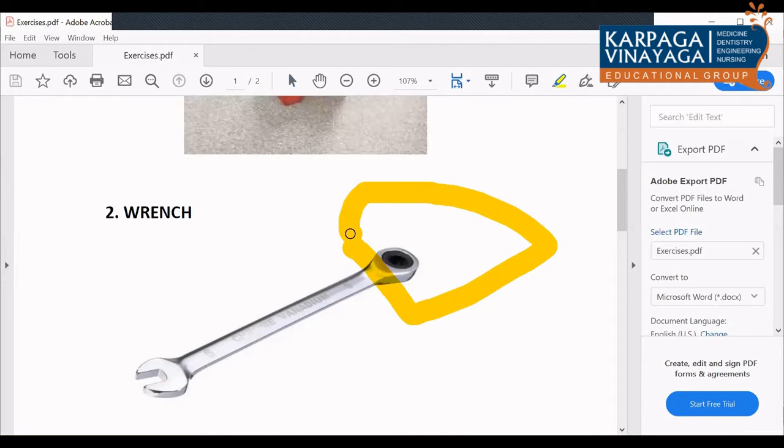So here how I am going to design is, first I am going to design this part. Next I am going to design this one. Next I am going to design this rectangle part. So I am splitting this into three different parts.

One is this ring, and another one is this end, of the nut and bolt size - what is the common nut and bolt size. So going to design this, then I am going to design this rectangle, then I am going to assemble all these things together. This is a procedure what we are going to follow.

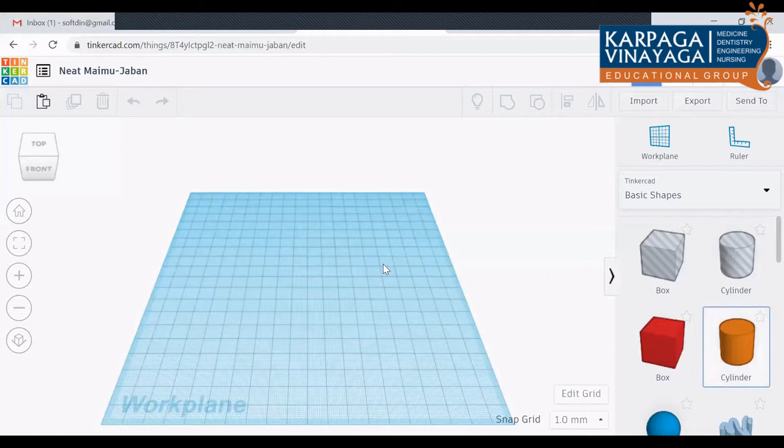Okay, so first I am going to design the ring. For designing the ring, I am selecting the cylinder and placing here. So you can select the diameter of your own dimension, depending upon the spanner size, depending upon the diameter size.

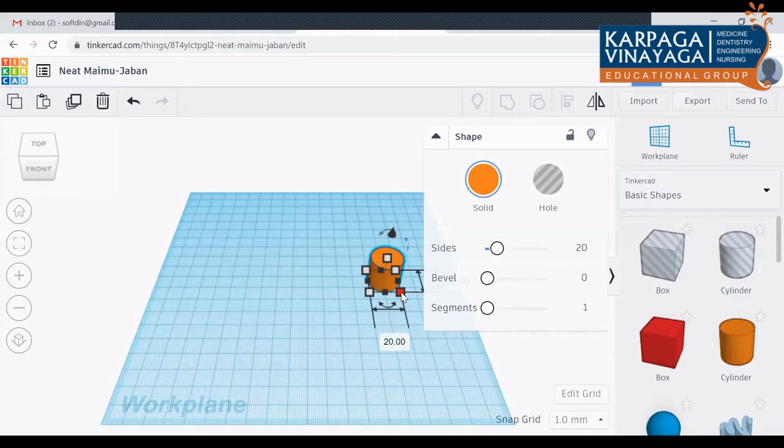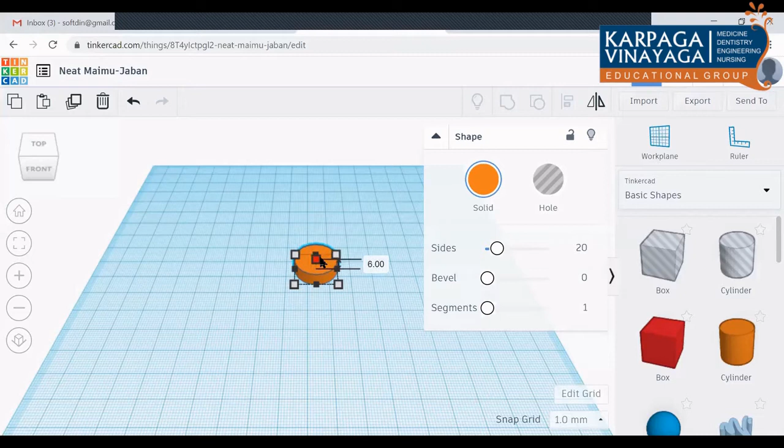If you want some 20 mm diameter size or 15 mm, whatever you want, you can select the diameter here. So here I am fixing it to 20 mm as it is, 20 mm diameter size. And width, I am going to take as the height - I'm going to take it as some 4 mm, or I can take it as 5 mm.

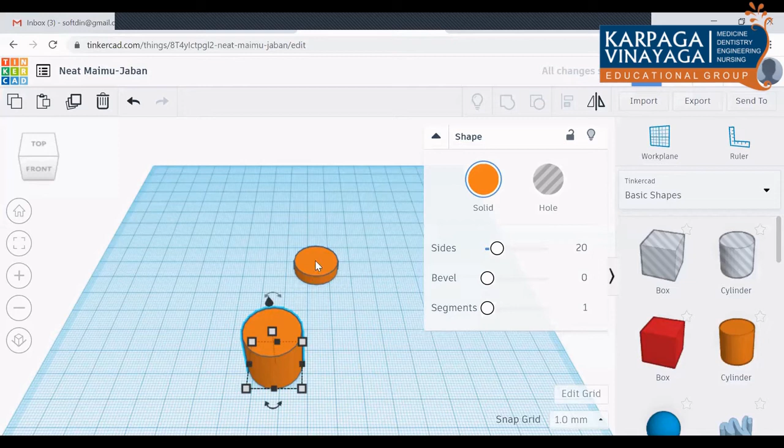Okay, fine. Next, I am going to make a hole here. For making a hole, what I am going to do is click another cylinder, place it here, place it here. You take the same diameter here - what is the diameter here? We have taken 20 mm.

The same diameter here, 20 mm. Next thing is make this as hole, this one as hole, because we are going to have a hole there. Make this as a hole. Then I am going to move this hole inside this.

For that, I am going to align whether both the things are in the same line. For that, I am going for the align option. Click this object first, next click this object second, then you click the align option. I think if I am going fast, you can tell whether you are practicing simultaneously what I am saying.

Yes sir, yeah fine. So now I am going to align these two objects in a straight line. For that, I am going to click this - can you see now, you click that center button. So now both the things will be aligned in the same straight line.

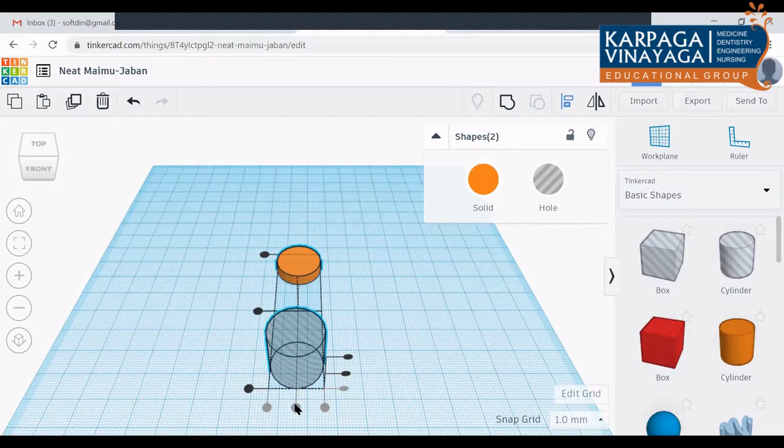Next thing, I am going to move this block over here. So click this part here. So now you can able to see - okay, so this comes over here.

Now what will happen? Can anyone tell? Both the diameter sizes are same. If I group this, what will happen? Here both the diameter of this hole as well as the diameter of the solid are both same.

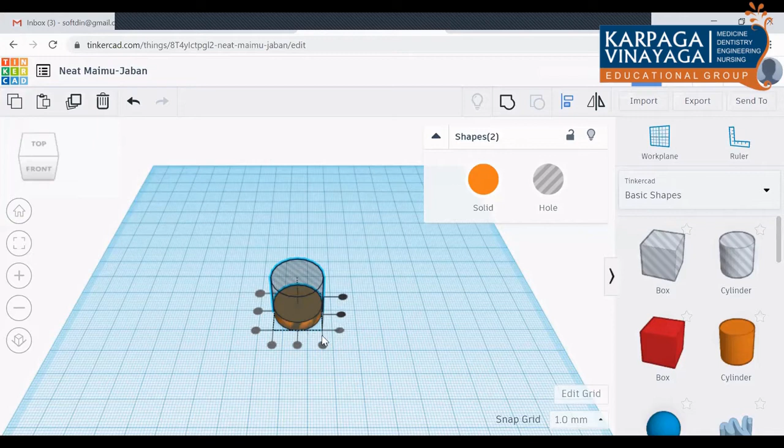I will tell you, suppose if I group this, both will vanish. You can see - clear? Because both the things are of the same diameter. So for that, press Ctrl Z, Ctrl Z.

Okay, so this diameter I have to reduce, because the hole should be less than this diameter, no? So I have to reduce that.

Sir, if you don't mind, already the ring shape is available in default. Yes, if already there, okay - default, some shapes are there here. Okay, you can take that, but this is a basic approach.

With the help of the basic shape, I am going to explain how to do this. If it's already there, you can just take that and place it there. So here I will tell you - the initial diameter I have taken as 20 mm. Now here I am going to reduce it to somewhat less than that. So this is 20 mm, I am reducing it to some lesser value.

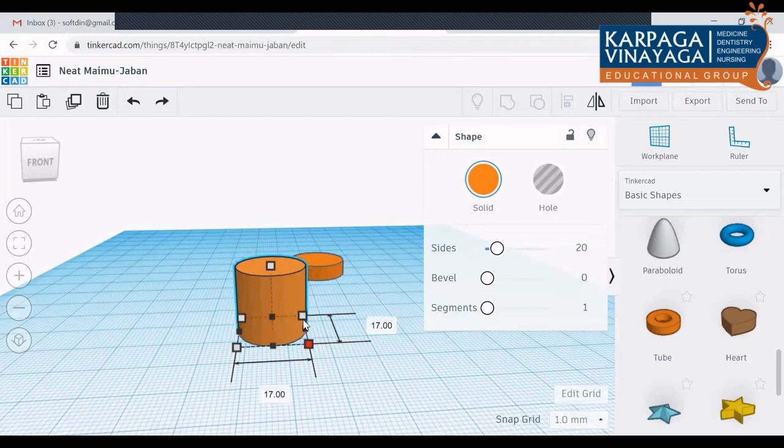So whatever diameter you want of the required bolt, you're going to have a hole here. Suppose I want to turn a circular net of some diameter around 15 mm or 16 mm. Okay, so here I am taking it as 17 mm.

Now, initially this is 20 mm, now it is 17 mm. Now you will get a hole. So now you convert this into a hole, then you align these two.

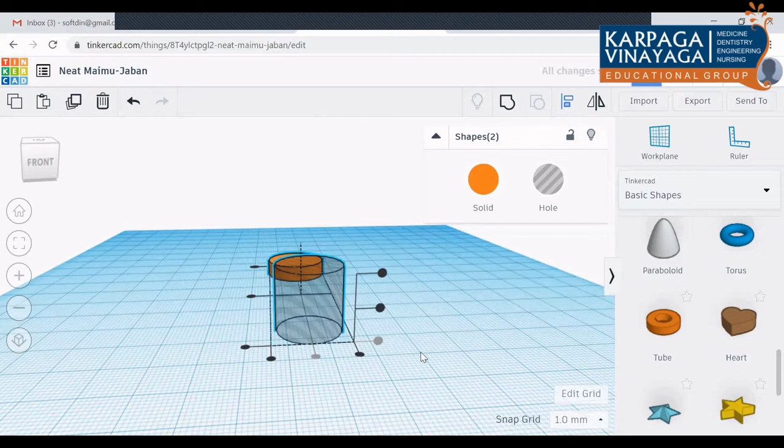Select these two, then you go for align. Select the center point, so now we can see both the things in the same straight line. Then you keep it here, press this. Now it will move over this.

Now you can see there is a width, there is a step you can see here. Now if you group it, you can able to see a hole here. You can see here. Okay, fine. So this is the first thing.

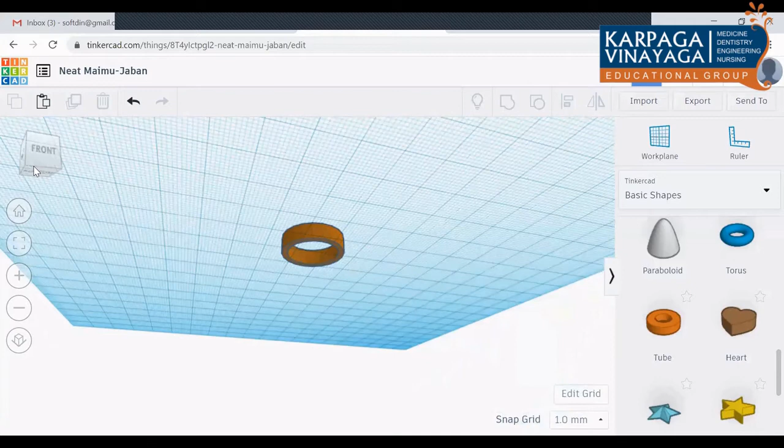You keep it as it is. First part is over. Next I am going for that rectangle. So keep this. The length of the rectangle is how much distance you want, you can take that, and height should be equal to this.

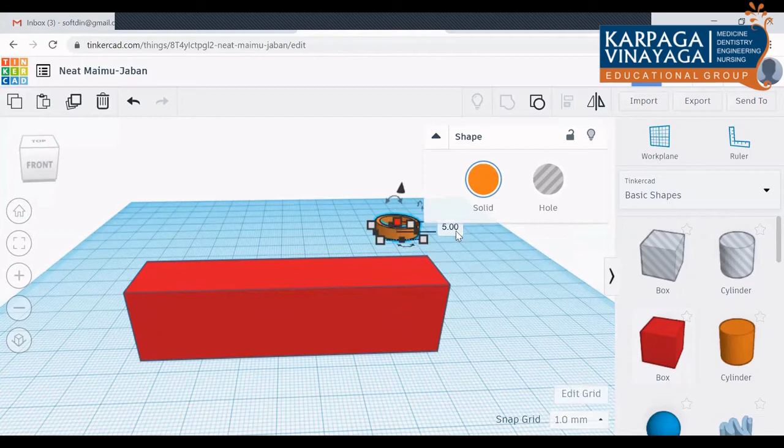Here height I have taken it as 5 mm, so the same 5 mm I have to keep it here. So reduce this height to 5 mm. Okay, once it was ready, 5 mm, now you just keep it as it is.

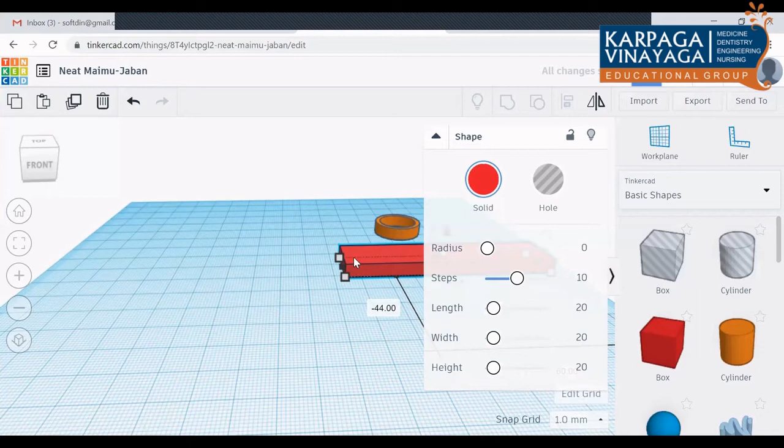So this rectangle part is over. Next I am coming for that other side. Okay, other side is this one. So this I am going to design now.

Okay, so here the nut may be anything. Here the shape is a rectangle form. Suppose I am going for a nut. If you see a nut and bolt, the head of that bolt will be either hexagonal shape, or circular shape, or square shape. So based on what you require, you can select the polygon here. Okay, so here they have taken it as a rectangle.

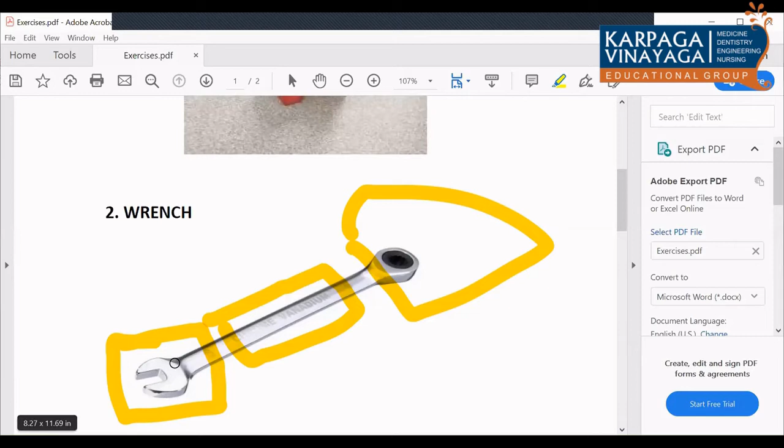So for that, first I am going to select a cylinder, same thing. 20 mm, then I am going to reduce the height. All are equal to 5 mm, everything, so that you will get a flat surface. So 5 mm I am reducing this.

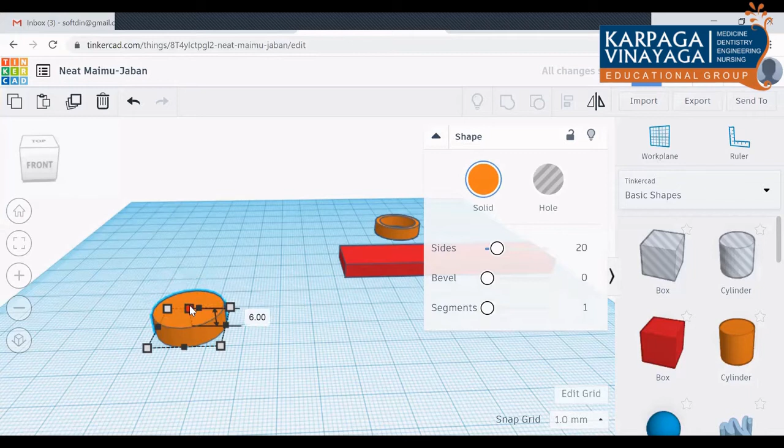Once it becomes 5 mm, now I am going to place either a square or rectangle or a hexagon, whatever it may be. Suppose I want a hexagon. You can see a polygon option will be there. You can select it.

Okay, if you want to increase or decrease the size, you can do that. Suppose I want a pentagon, I can go for 5. Rectangle, triangle, you can put it here. Okay, so here I am going for a hexagonal shape.

So same thing, this diameter is equal to 20 mm. So now I am changing this width accordingly. The same 20 mm is there, no? So I am reducing somewhat less than that. Then only I can create a hole in that. So I am reducing this.

Some 17 mm I am reducing this. Okay, fine. Once it was reduced, now I am going to make this as a hole here. So click hole here, click this object and press the hole button here.

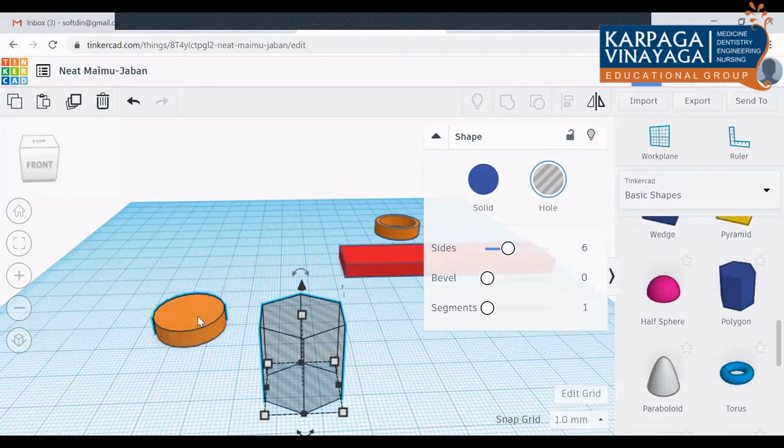Now I am going to make these two objects in the same straight line, that is, I am going to place this over that cylinder here, so that the hexagonal shape hole will be created there. So for that, I am selecting this and selecting this, then align it. Press the center line, so both the things will be in the same straight line. Then you press this.

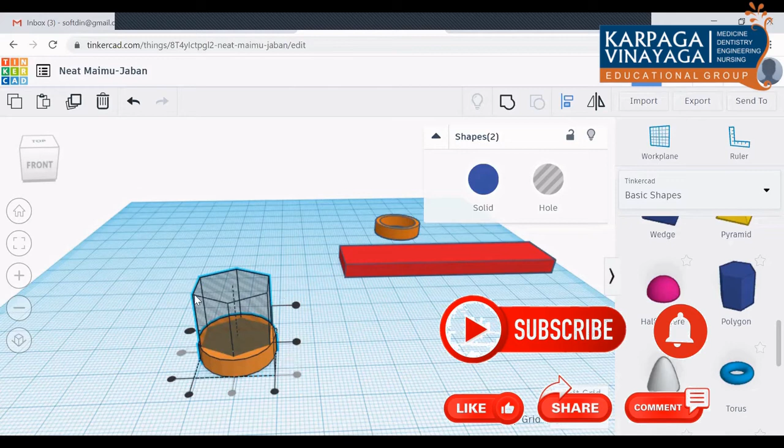Okay, so here if you see, all the six sides are coming in the circle. Clear? But if you see the spanner, you will get only three sides in the circle. So the remaining three sides should be outer, and you have to change the dimension accordingly.

I think you understand what I am saying. Not all the six sides of the hexagon will be in the spanner, only three sides will be in the spanner. So you change the dimension accordingly.

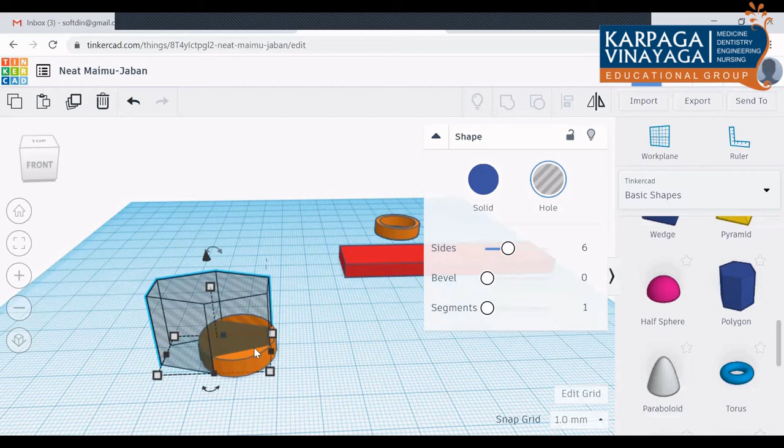So just expand this, this dimension should be according to the bolt size, whatever you want, you can change that. This side should be equal to the bolt size, then only it will fix with that particular bolt. Okay, fine. Once it is done, then you can go for grouping.

You can see here, it will come accordingly whatever shape you have given there. It's up to you to create the dimension there.

Suppose you want less than that. No sir, can you repeat this step again? Yes, sir.

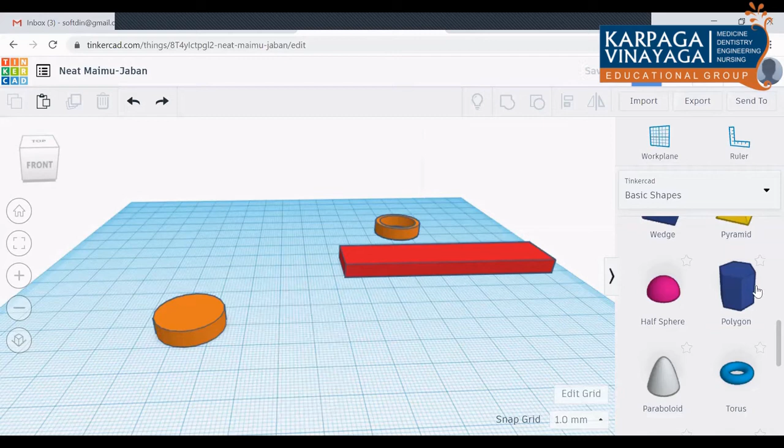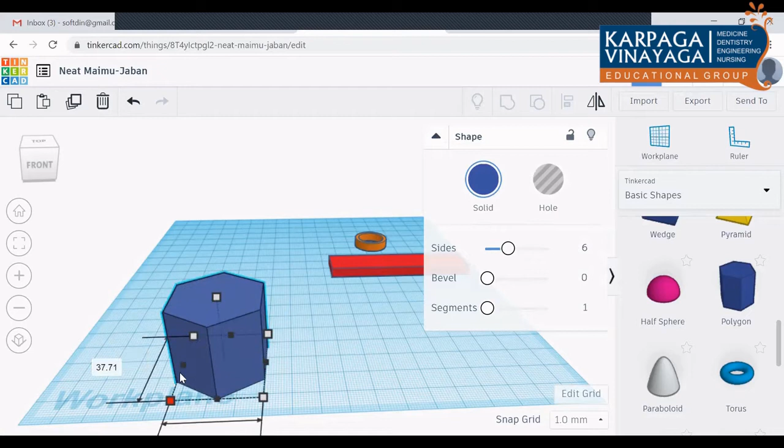It may be because we are creating a hole, no? Let it be whatever may be the height as it is. Next, you change the length here. And this, with the side of that polygon, should accommodate in that cylinder.

The maximum diameter of that cylinder is equal to 20 mm. So you change the dimension accordingly. If you want a more dimension for the polygon, then you change that cylinder into a larger diameter. So it's up to you to give the dimension.

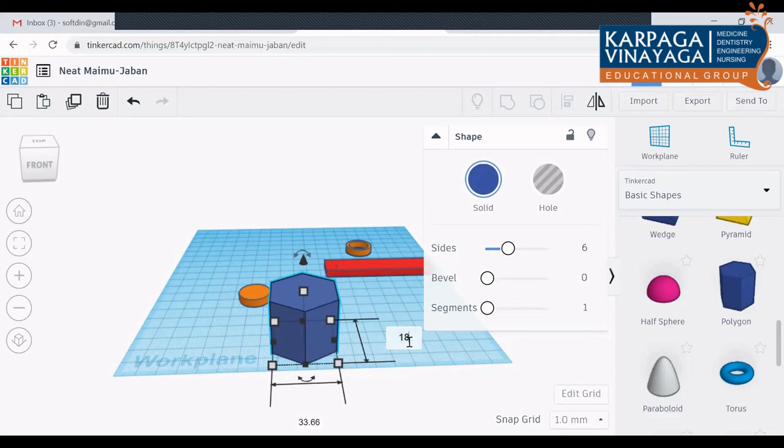Here I am giving around some 18 mm or 17 mm, 17 mm side hexagon. Hope you understand, no? Okay, fine.

Next thing is I am going to convert this as a hole, because this is a hole we are going to cut. So I am converting this as a hole.

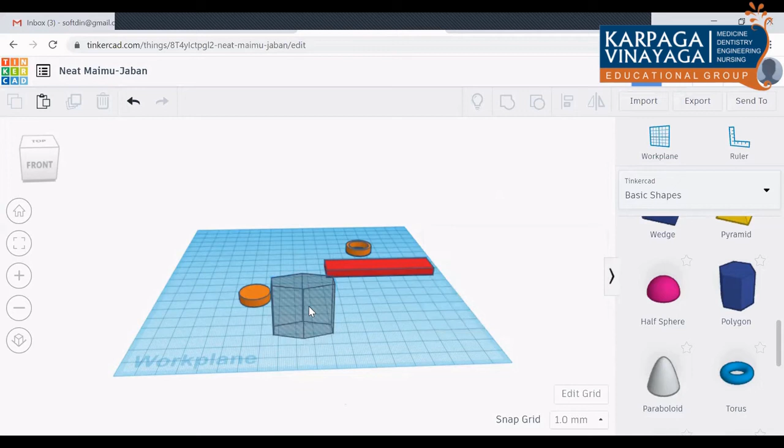Next, these two should be aligned straightly. So select this, press shift button on your laptop, press the second object also. Now I am going to align both the things.

So click the center button. You can see the select center black color rectangle here, no? Just click that.

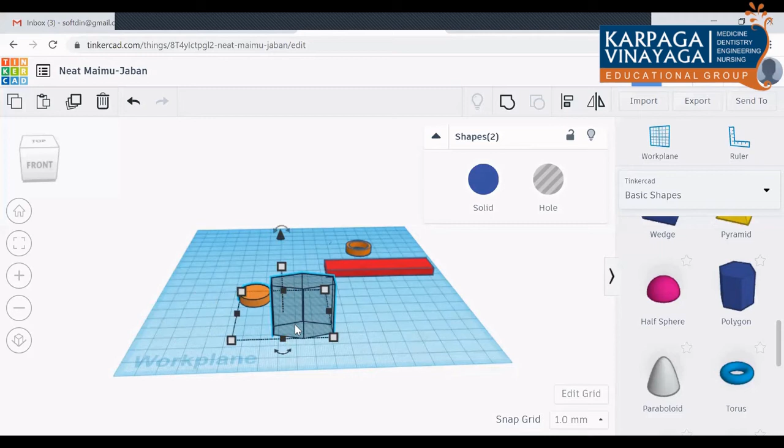Align it. Then you click the select center button. So now you can see both this hexagon and this circle is in the same straight line.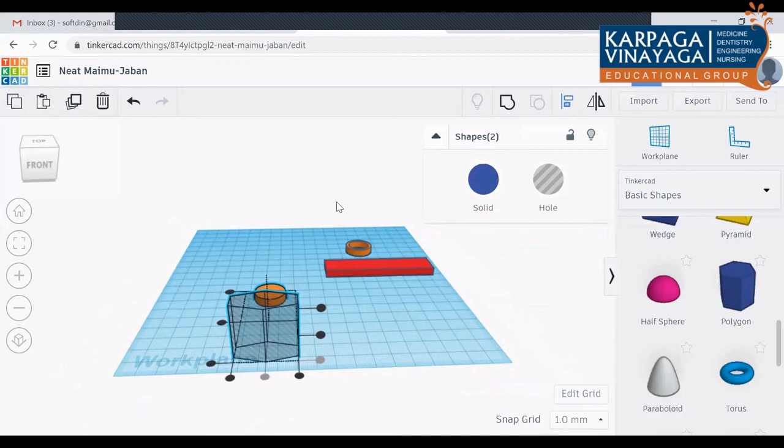I think you understand. Up to this, any doubts? Anyone has any doubts? Can I proceed further? Yeah, fine. Yes, sir.

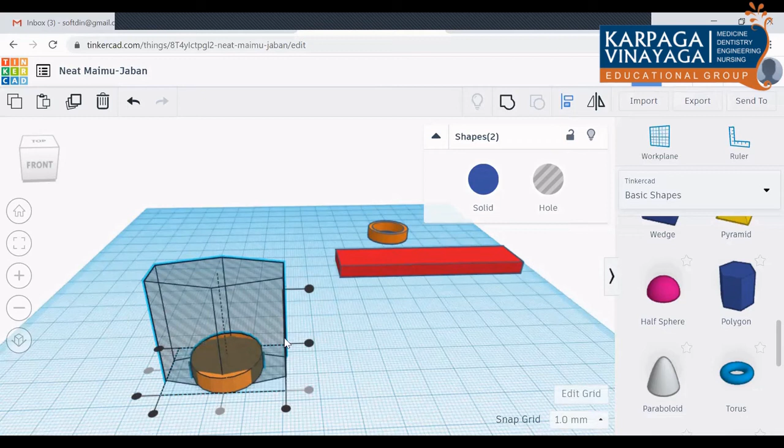Move this to this point. Click this button. Move this to this point. If you see, whether your dimension is based on your dimension, if you give more dimension, then it will come out of your cylinder. Then you have to change the dimension of the polygon, or you have to change the dimension of the cylinder. So here it is coming out.

So I am changing that, changing the dimension of the polygon. You can see here, so that it will fix inside the circle. So you can design this as per the dimension what you want.

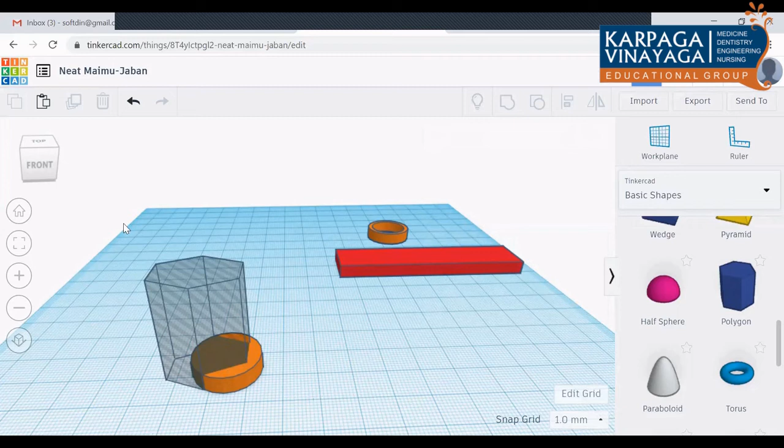Okay, so now I am fixing like this. Then I am selecting this. Then I am going for the group option. So you got this, no?

So I got the three different parts. Up to this, any doubts? Anyone has any doubts? No, sir. Okay, no problem.

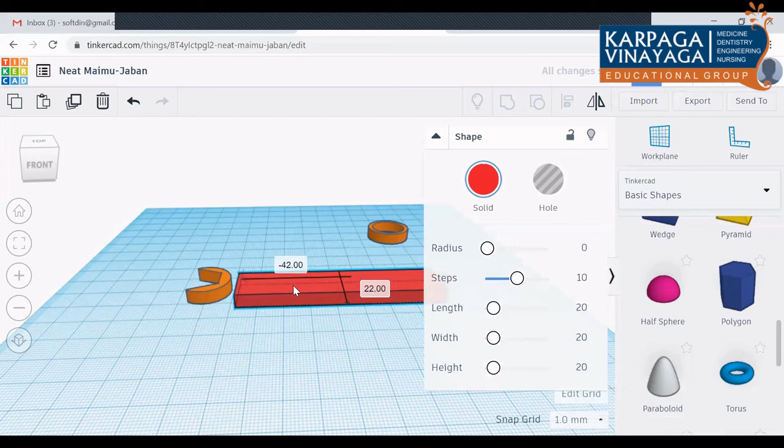So now I am going to align all these three things. First you align these two. Similarly, select this and select this. Click align. Click the center button.

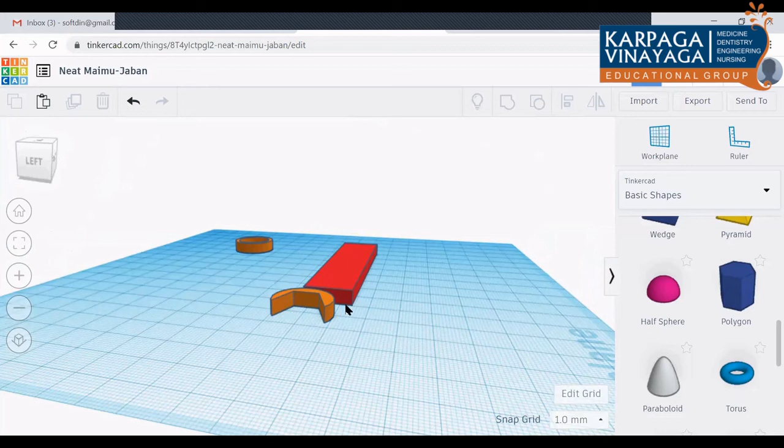Click this. Shift, click this. Click align. Click center button. Now it comes in the straight line.

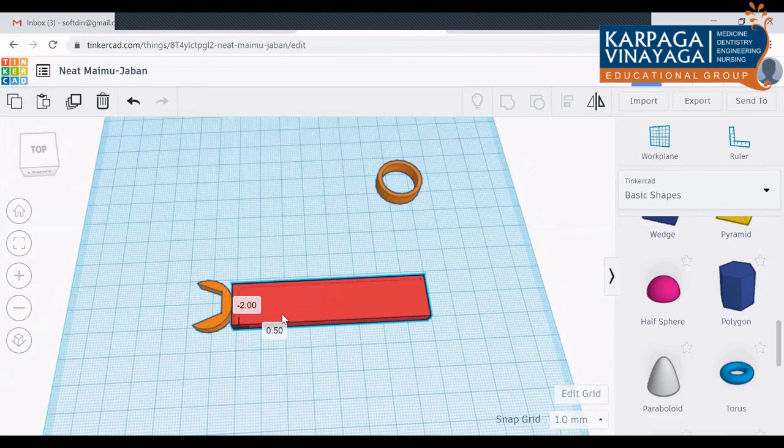Now there is a gap here, no? So what you are doing is just move this rectangle to some distance over the wrench, like this.

Okay, next thing is you group this. Or if you want, you can bring it somewhat lighter. Then you group this.

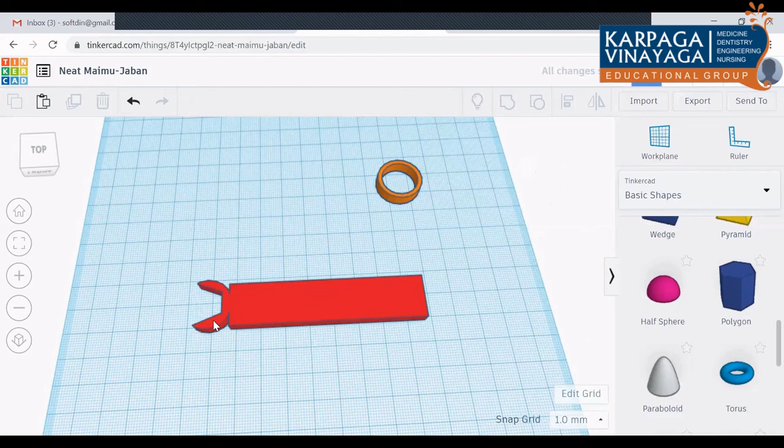So it will depend upon the dimension what you are giving there, the circle diameter. Or if you want to reduce the length of this rectangle also, you can reduce. That is up to you.

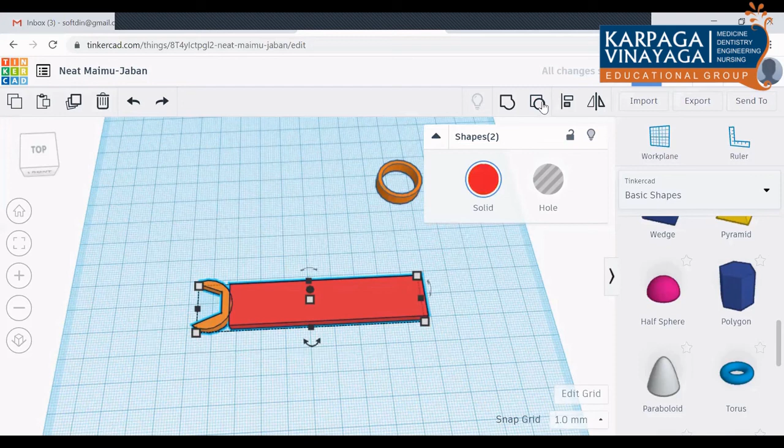Without ungrouping that, you have to reduce that. So dimension accordingly, you will get the object. So I am going to reduce the width of the dimension here. So if you want to change any dimension, you ungroup it, then you change.

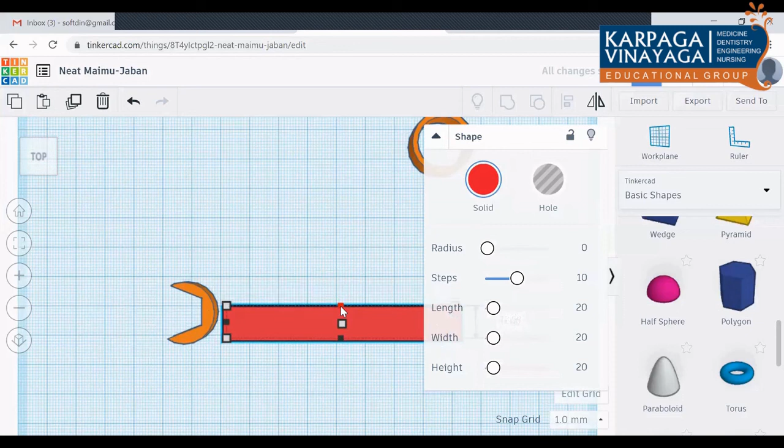So width I am somewhat reducing so that it can fix perfectly there. Once it was done, then I am going to align these two.

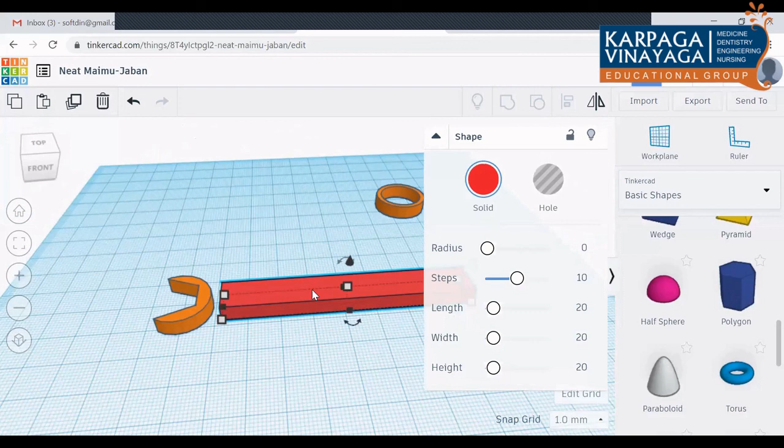Then I am going to move this rectangle. Okay, now I am going for the grouping option. Now it's okay, no? Fine.

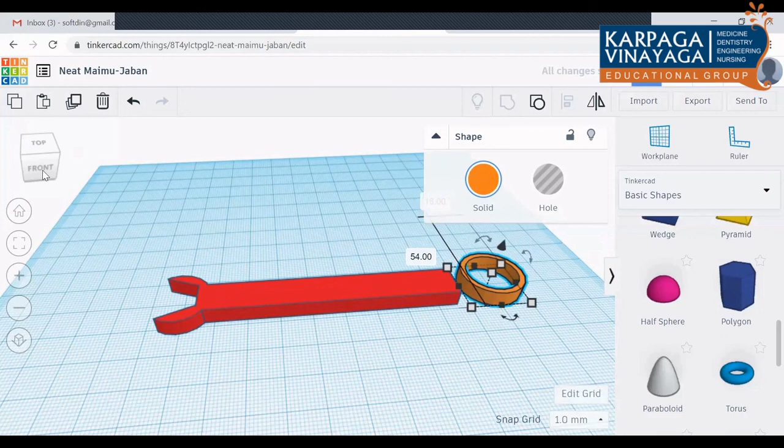Okay, next I am going to group this here. Same thing. Keep the object here. Go for rotate this. Go for the same alignment option.

Click the two objects. Align it. Go for the center line. So now it was aligned.

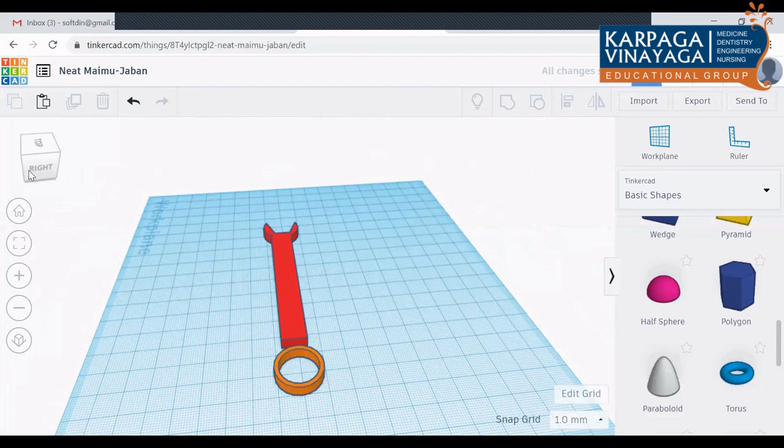Next step is move that rectangle to this. So if you give some more wall thickness here, then it will be perfectly fit. Okay, once it was done, then you group it.